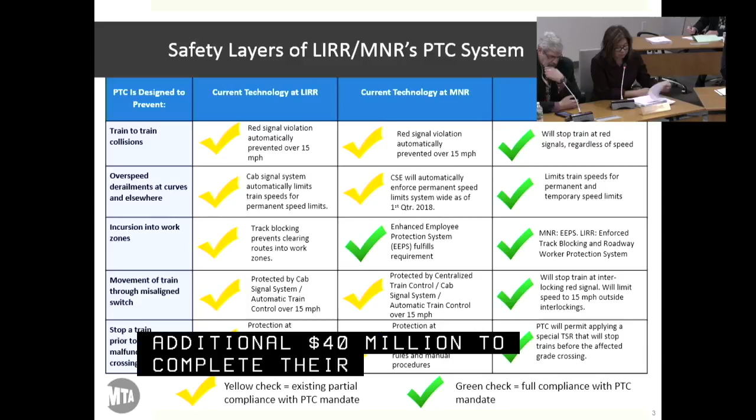This slide, the last time we met in October, it was apparent that we had not done a good job conveying the fact that we already have a PTC system in place that currently meets some of the FRA mandates for PTC implementation. The way Metro North and Long Island are deploying their PTC system, it's an overlay system. We're implementing the advanced civil speed enforcement system, which is found on other Northeast Corridor railroads, on top of our existing signaling system. This table conveys that information based on the yellow and green check marks.

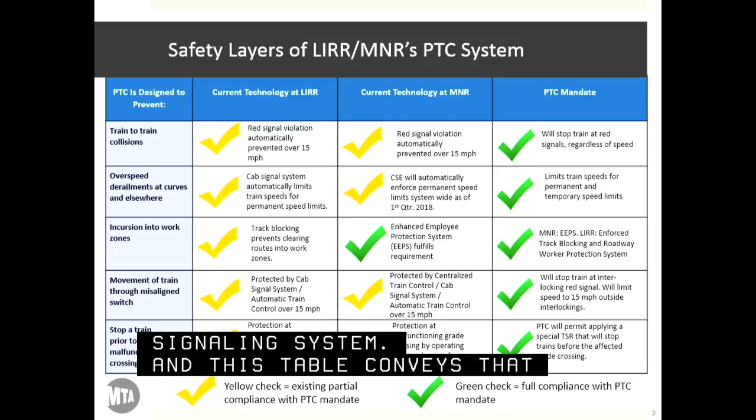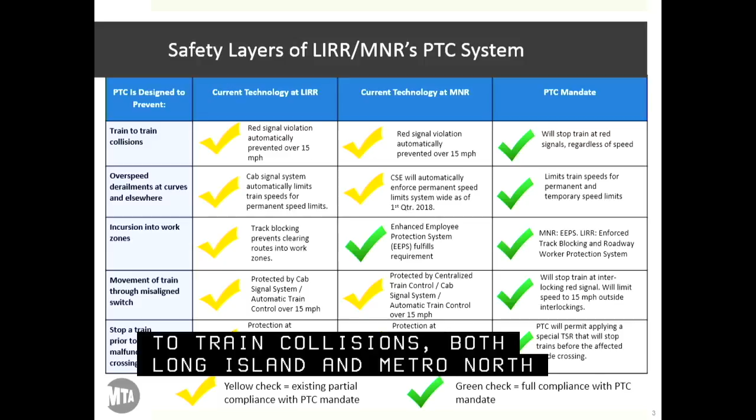The left-hand column shows the 5 PTC goals and identifies what PTC is designed to prevent. As far as preventing train-to-train collisions, both Long Island and Metro North have existing PTC systems that automatically prevent red signal violations for train speeds over 15 miles an hour. With full PTC, a train will have a positive stop at red signals regardless of speed. This will prevent all head-on and sideswipe collisions.

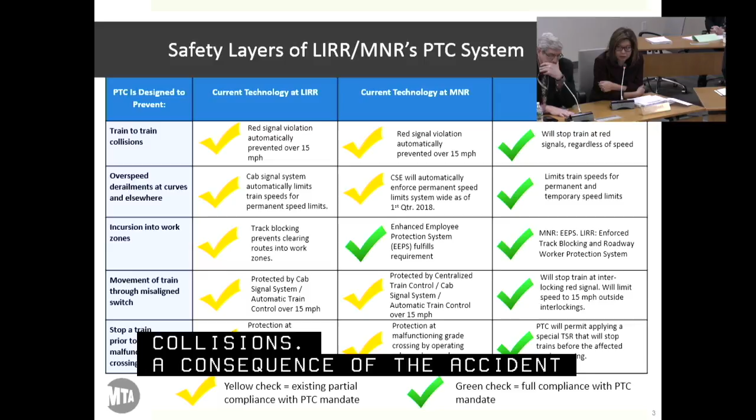As a consequence of the accident at Spuyten Duyvil, Metro North and Long Island went back and looked at their signaling system a couple of years ago. Currently, Metro North and Long Island both prevent overspeed derailment at permanent speed restrictions utilizing different methods. Long Island Railroad updated their cab signaling systems and implemented various modifications to prevent a train from reaching overturn speed on any curve under normal operating conditions.

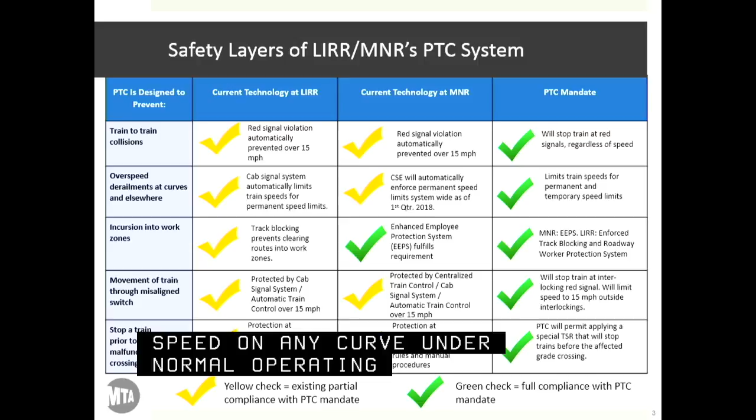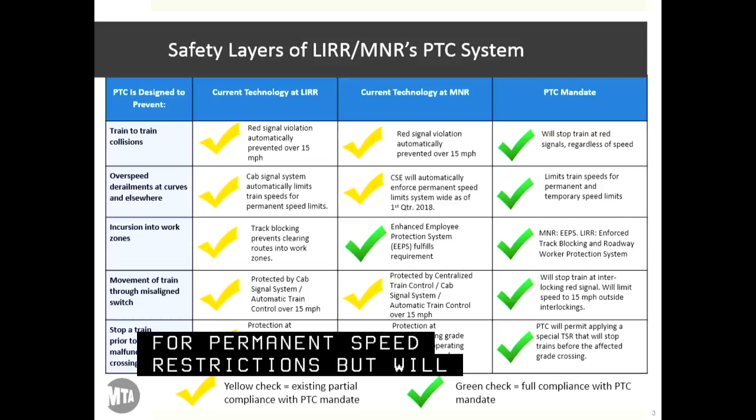Metro North has advanced the use of their PTC transponders to implement civil speed enforcement, and will have civil speed enforcement implemented system-wide as early as the first quarter of this year. With full PTC, both railroads will not only limit train speeds for permanent speed restrictions, but will also be able to do it for temporary speed restrictions when there is an anomaly on the railroad, such as a broken rail. They'll have to complete their office subsystem in order to have that capability.

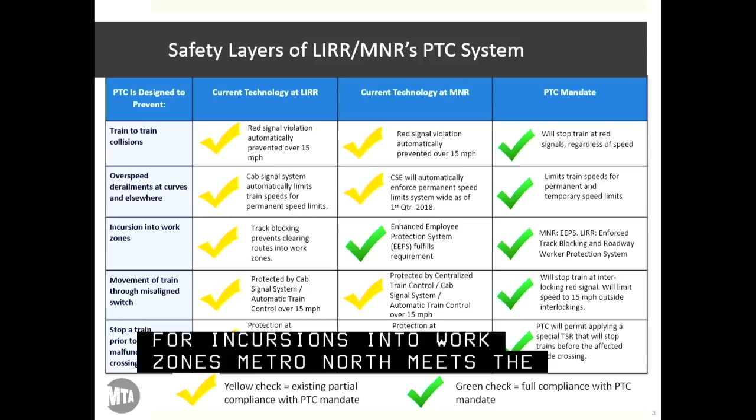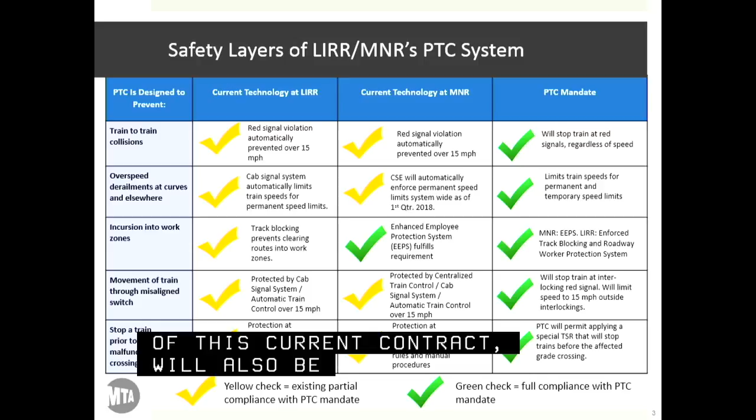For incursions into work zones, Metro North already meets the PTC mandate with their enhanced employee protection system, which has already been approved by the FRA. Long Island Railroad has track blocking, which allows a dispatcher to prevent routes into a work zone. Long Island Railroad, as part of this current contract, will also be implementing an ancillary roadway worker protection system. This new system will prevent anyone other than the roadway worker in charge from removing the work zone protection, which is a much safer system than we have today.

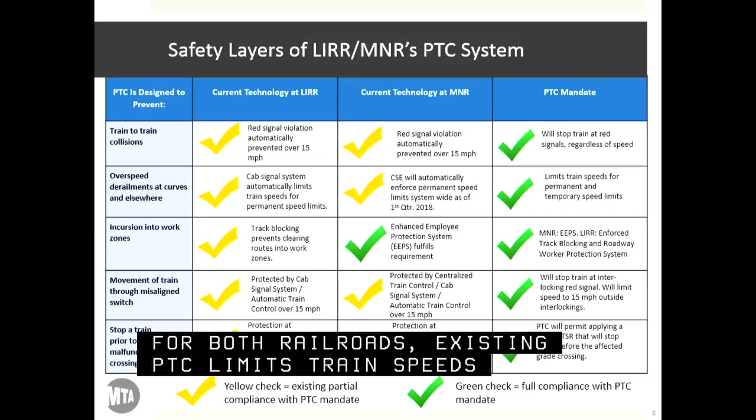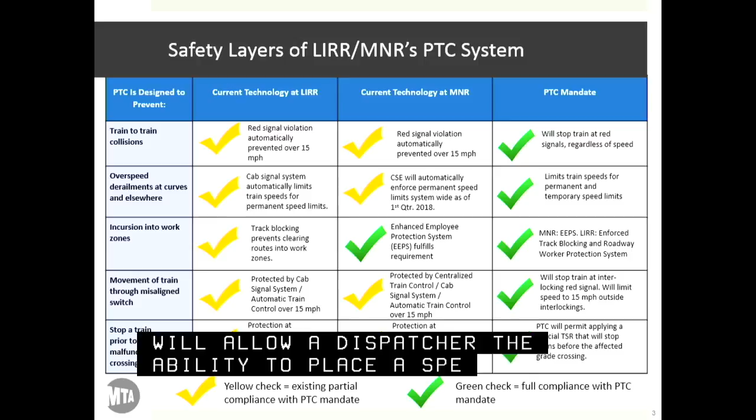For both railroads, existing PTC limits train speeds to 15 miles an hour if the switch is not properly aligned. Full PTC will prevent movement over misaligned switches. Protection at malfunctioning grade crossings is currently handled by operating rules and manual procedures. With full PTC deployment, PTC will allow a dispatcher the ability to place a special temporary speed restriction that will stop trains before the affected grade crossing.

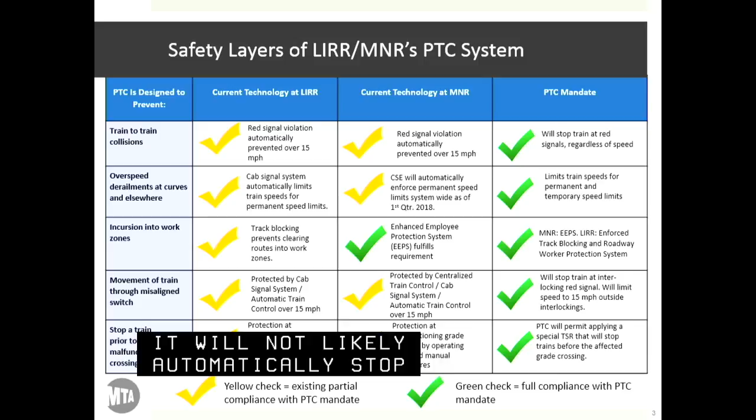However, the notification of the failure of a grade crossing is still a manual process, and someone will still have to report it, and it will not likely automatically stop a train knowing that there's a car on the tracks.

At the last board meeting, there was also a request to provide a simple dashboard to give everyone an idea of how the railroads are doing to meet compliance at the end of 2018 and also get the project completed. The four left-hand circles on the diagram identify the 4 criteria to be in compliance at the end of 2018.

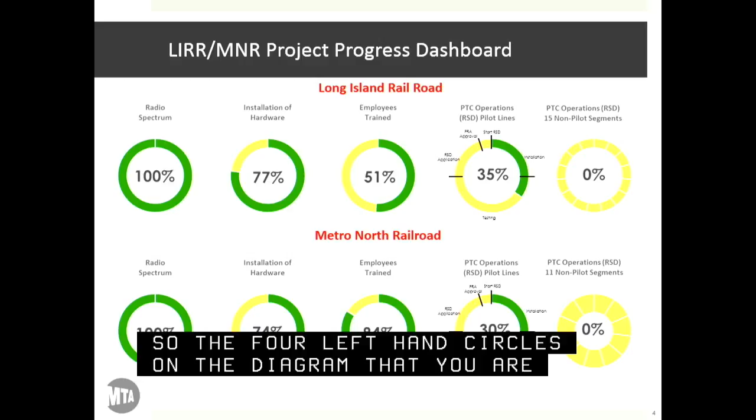The first is the acquisition of radio spectrum, which both railroads currently have. The second is the installation of hardware, and both railroads are roughly at the high 70% mark. The third is training, and we're clearly on our way to meeting our goal and completing that before the end of 2018. The fourth circle is probably the most challenging.

It's the criteria to have one of our subdivisions in revenue service demonstration. What this means for the railroads is we each have pilot lines approved as part of our implementation plan, and we need to show that our system has been fully tested and is safe enough for the FRA to approve and allow passengers to ride on those trains.

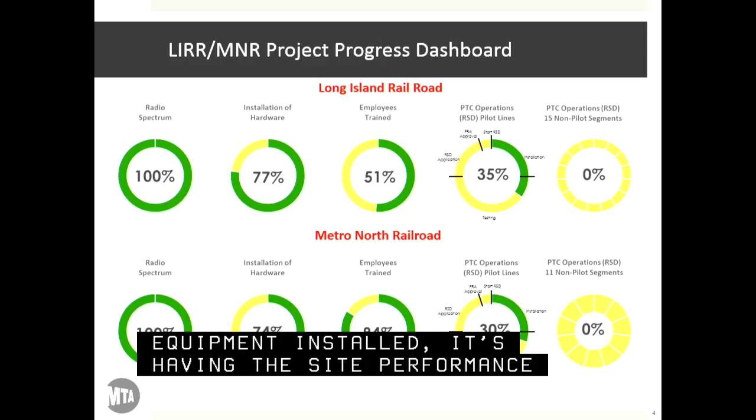The criteria to meet the RSD for the pilot lines is broken into having all our hardware installed, which both railroads have for their pilot equipment. It's having the site performance testing and data to support that completed, which we've started already. Part of it is the application to the FRA to get our revenue service demonstration approved, and then it's the actual approval. Both railroads have already started working on our application, so those four criteria is what we need to be in compliance.

Can I just ask, I assume when you say Metro North, you're referring to east of Hudson only? Yes, that's correct, and I'll get into a little more detail on that.

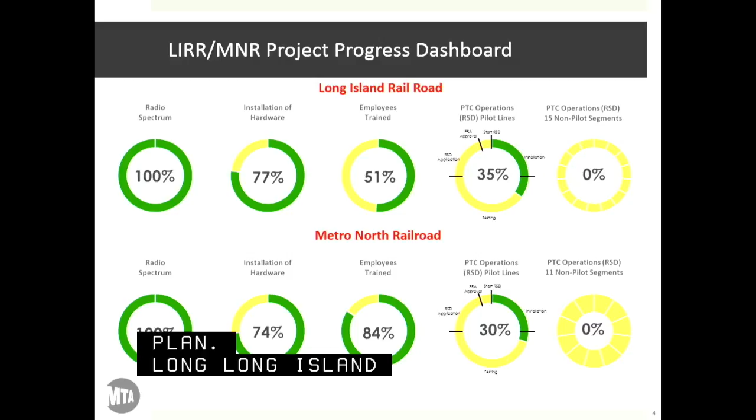Thank you. The fifth circle is what we need to complete the project, and each one of those tick marks indicates a non-pilot segment that's part of each railroad's implementation plan. Long Island Railroad has 15 additional line segments, and Metro North has 11. Each of those tick marks is equivalent to one of the circles on the left of the fifth circle.

The next three slides are our way of trying to convey the progress the railroads have made in hardware installations. Since we're all in the home stretch right now, we've tried to consolidate all the information on these few slides. The left-hand column shows the various elements of the PTC system. The system requirements are the installations required by the contract, not necessarily what's required for the FRA mandate, and that's shown in the column indicated in gold.

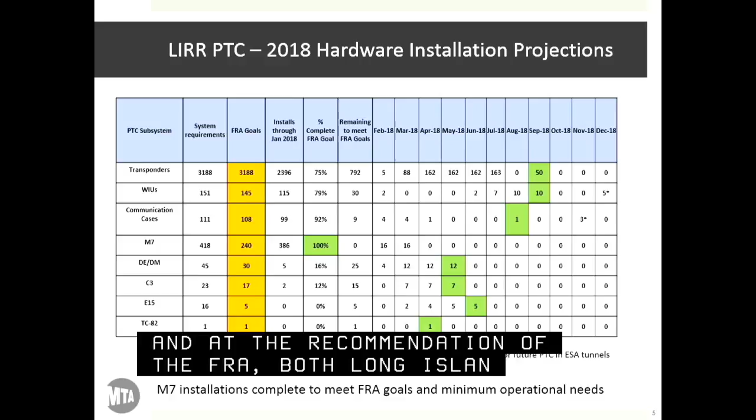These are the numbers to meet the PTC implementation plan, and at the recommendation of the FRA, both Long Island Railroad and Metro North have submitted revised goals for the hardware. As you can see, the numbers for the wayside elements are the same as what's required by contract. However, the numbers required for the trains are less, because in order to run operations you only need the front and back end of the trains equipped, so you don't have to equip all of them to meet the mandate.

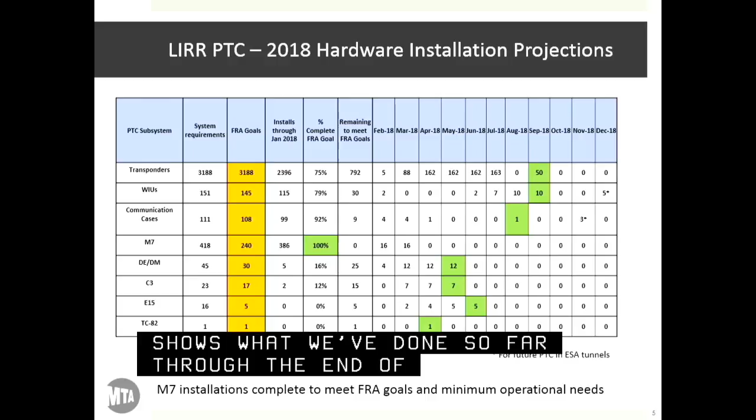The percent complete column shows what we've done so far through the end of January, and the remaining goals shown here is the projection to meet completion of the contract. The green highlighted boxes indicate the month in which we would meet the FRA goals, and the numbers shown on the projections are to meet the contract goals.

As you can see on Long Island, we have a couple of outliers until about November, December. Those are actually for work being done on the East Side Access tunnels, which is not required for compliance. But you can also see that Long Island Railroad has met their goals for the M7 installations.

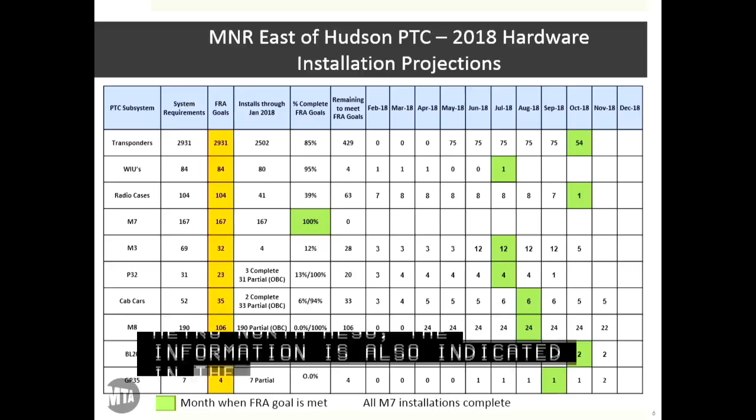On the next slide, similarly, Metro North's information is also indicated in the same way, and as you can see, they've already met their goals for the M7 installations as well.

They've shown their hardware projections in two slides. The first one is for east of Hudson, and slide seven is the installations for west of Hudson on the Port Jervis line. The important thing to note here is that the Metro North installation numbers are dependent on New Jersey Transit, which is responsible for the design and equipment provided to Metro North so that they can install it.

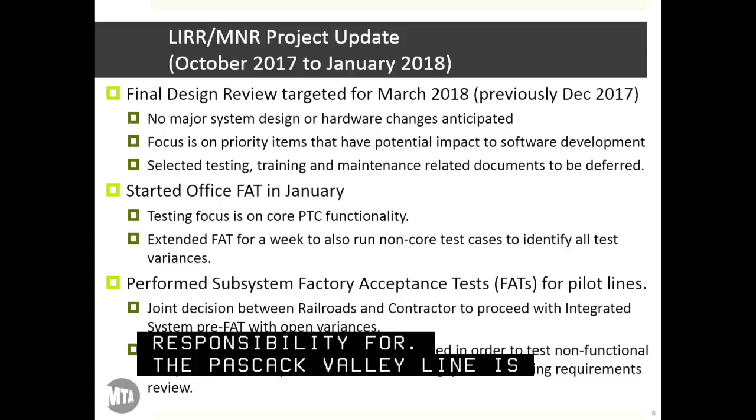I'd like to add that's the portion that Metro North has responsibility for. The Pascack Valley line is totally in the control of New Jersey Transit, so we're not neglecting a line — it's just not within our bailiwick at the moment. Thank you.

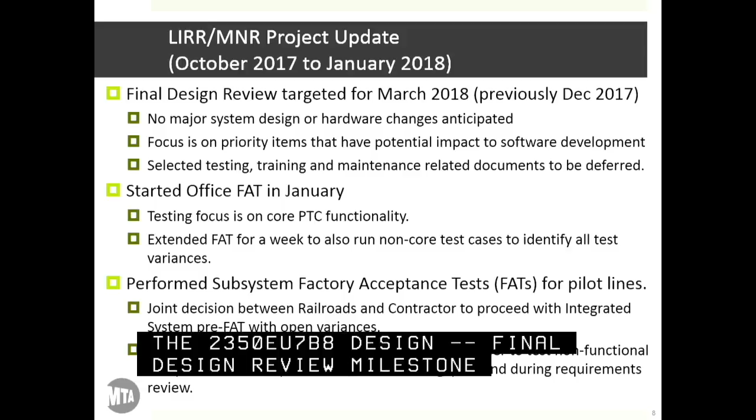Since we last reported in October, there were several project milestones that the project team was working hard to achieve. The final design review milestone should have been completed at the end of last year, but has been pushed into March. The delay in this milestone is somewhat less concerning than last year, as the team has done more testing and does not foresee any major system or hardware changes.

The team has also reviewed and approved most of the documents that have potential to impact software development and prioritized the necessary documents required for the FDR milestone. For instance, some of the documents related to training and maintenance have been deferred and are not directly tied to the design.

Both railroads started their office FAT and have subsequently also completed it in early February. To help mitigate some of the schedule delays, the focus initially was on testing the core PTC functionality. The testing teams also allotted an additional week to complete all of the testing for the non-core functions to identify all test variances before advancing to the next phase.

The success rate for the non-core functions did not meet the entrance criteria for the start of integrated system FAT. For Long Island, we had a success rate of roughly 82%, and Metro North had a success rate of roughly 68%. Based on that, the railroads and the contractor sat down, reevaluated the risk to move forward, and made a joint decision that we needed to move forward with open test variances.

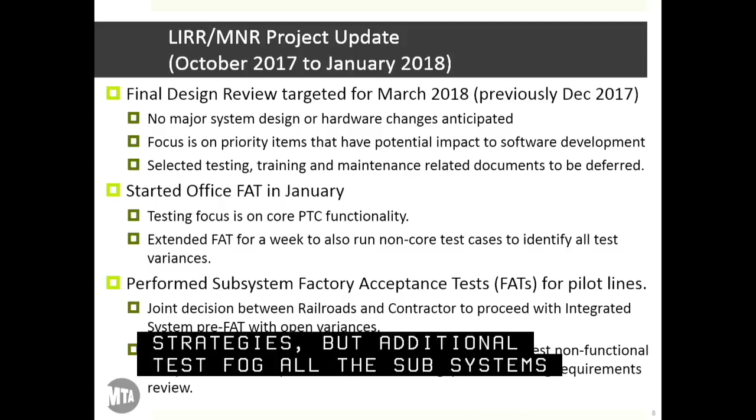I'll talk a little bit more about some of the mitigation strategies, but additional testing for all the subsystems remains to be scheduled, and the plan is to correct all of these test variances before we exit site performance testing on the pilot lines.

Another important activity that was raised by the IEC in their last report is the verification and validation of the PTC Vital database. Happy to report that this particular activity is moving forward. The contractor completed the work for the pilot lines in order for us to start our pilot testing in the field. They've added more resources to this activity, and have also been able to validate the process for the non-pilot lines. We don't anticipate any issues completing this task before May in advance of field testing.

Like we had reported, we continue with deliveries and installations. We're also continuing our efforts with training. No anticipated delays in completing that before the end of 2018.

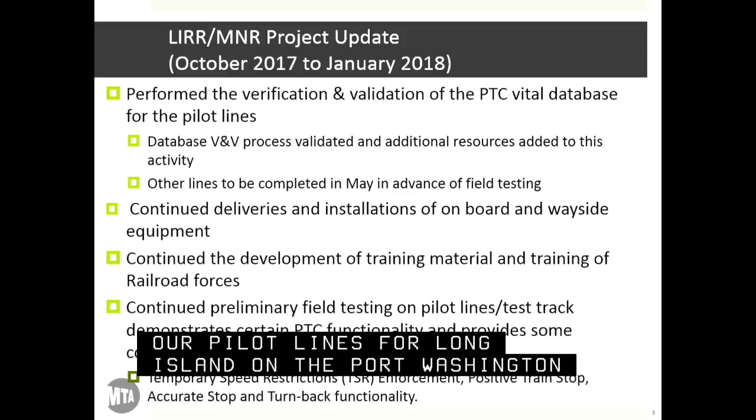The other good news is we have started field testing. Preliminary field testing on our pilot lines for Long Island on the Port Washington line, and Metro North on their test track, we've been able to demonstrate certain PTC functionality, giving us confidence in certain elements of the system design. We've been able to demonstrate the ability to send a temporary speed restriction list to the train and have that speed enforced. We've also been able to demonstrate positive train stop, accurate stop, and turn back functionality. So that's good news for us.

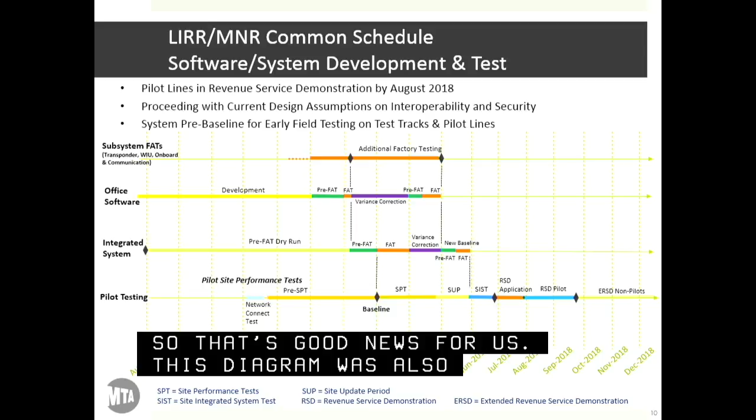This diagram was also a request by the board to provide more details about the software and system development. A little complicated, but what we try to do here is convey in a simple manner the complexity of the situation we're in regarding the development of the office software and subsystem FATs.

The top line shows the consolidated subsystem FATs for the elements of the wayside interface units, the transponders, the communications manager, and the onboard computer software. That effort, like I had reported earlier, is on its way. We've accomplished enough to proceed with pilot testing. We still have some work to do as far as closing out variances, so this is why you see two diamonds there. The first diamond, we've already passed. We're working on correcting those variances so that by the time May comes, we have those corrections incorporated.

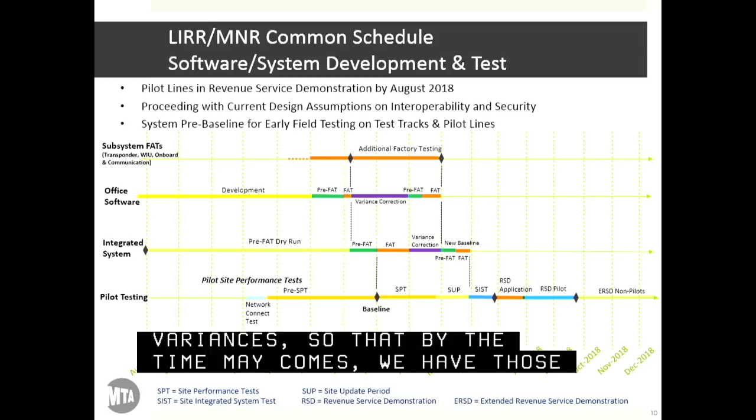The second line is the office software, which I reported we just completed the factory acceptance testing for. We'll continue to try to fix all of the variances that we've collected, and also give a little more time to the contractor to develop the functionality for some of the other functions such as interoperability and the roadway worker protection system for Long Island Railroad. The target is to have that also completed in the May timeframe.

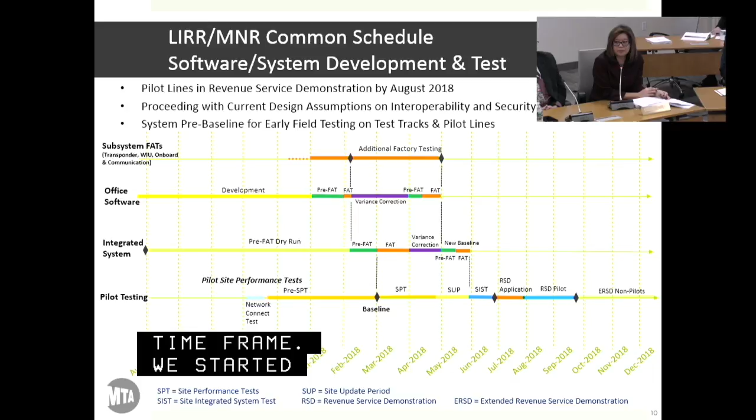We started the integrated system FAT, and we're slated to finish that sometime in the March-April time period. We will correct variances and try to get a new baseline software release sometime in the May-June time period.

As far as pilot testing, we're using a preliminary version of the software we already have to try to advance the identification of any test cases or variances that we may only see in the field. We will start site performance testing and go through what we call a site update period, when you monitor and verify the performance of the PTC system.

The plan is to fix all test variances uncovered during this period before we start the site integrated system test, the SIST period, when we would have the integrated software for all of the various elements. At the completion of SIST, we would have collected enough data to support our application to the FRA.

We have allotted a 2-month period for the FRA to review our application. Of course, there'll be a lot of other railroads submitting their RSD applications at the same time, so this is pretty aggressive, and this is an assumption on our part. In verbal conversations with the FRA, they've committed to try to meet this commitment and approve our application within 2 months.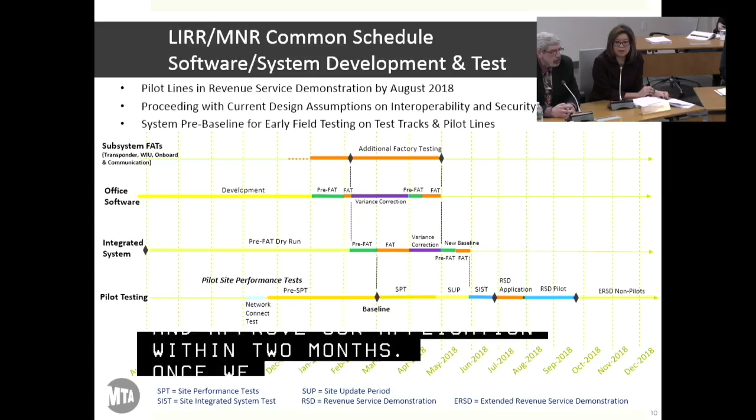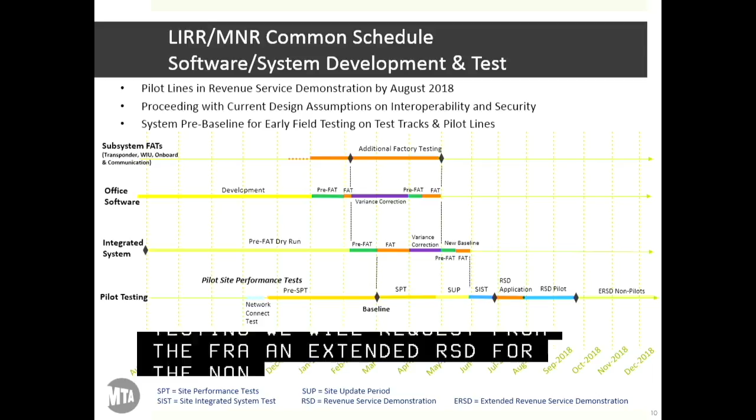Once we're in our RSD for the pilots, the concept is that most of the functionality issues uncovered during this period would account for all of the issues we'd find for the non-pilot. So when we get into non-pilot testing, we will request from the FRA an extended RSD for the non-pilot lines. During that particular period, we anticipate only uncovering issues that might be site-specific or unique to those actual lines.

The next slides provide a little more detail into the field testing, the approach the railroads are taking to place all the lines into PTC operations by the end of the year. While the railroads are waiting for the approval of their RSD application, shown in red, we'll start the site performance testing for some of the non-pilot lines.

In the case of Long Island Railroad, we plan to test 3 simultaneous lines and ramp up to as many as 6. This will take a lot of locomotive engineers and signal engineers to support that effort. The assumption is that most of the software bugs found during pilot testing would be corrected, and that only site-specific issues would be uncovered during this period.

Metro North has a similar plan. They have only 1 pilot line, and they were able to consolidate some of their line segments into one to make their testing more efficient. But the same premise goes for them as well, as far as vetting out most of their issues during pilot, which is why the time frame for the non-pilot lines is much more reduced than what was required for pilot.

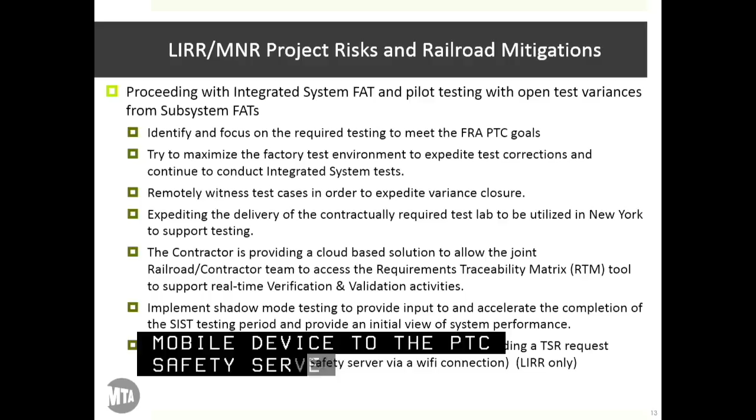So we're able to send a TSR request from a mobile device to the PTC safety server over a Wi-Fi connection in the lab, and we're able to prove that out. So in concept it works, but we just still need to complete the development of that function.

Another major risk is systems integration, and there are some issues that we can identify in the factory, and we've already found some and been able to rectify them, but many most likely will be revealed when we actually start field testing. So our biggest area of concern right now is the radio communications between the train and the wayside.

Another risk, and you've heard this before, and it's probably something pretty widespread across the industry, is the system integrator's ability to acquire and retain PTC knowledgeable resources to actually support the project to completion.

The railroads are still not satisfied with the level of staffing from the systems integrator, and although they've added staff in certain areas, they continue to lose staff in others.

So what they've done is they've acquired outside support for some of the key areas, such as design, testing, and requirements work. But of course, it takes time for these resources to gain the project experience, and in most cases, the SI continues to miss interim and major milestones on the project.

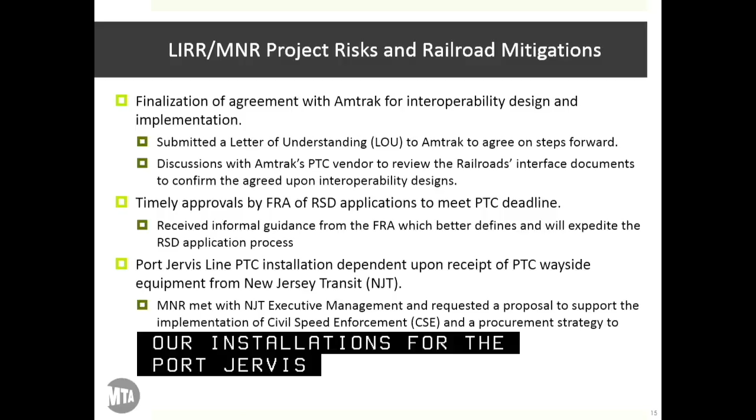The last risk is the dependence on New Jersey Transit to complete our installations for the Port Jervis line. Metro North has met with their executive management. They've requested a proposal to support the implementation of civil speed enforcement and a procurement strategy to expedite delivery of PTC equipment, so Metro North can get their installations done quicker.

The last two slides are a narrative on the project timeline and a look ahead. They provide, by month, project milestones through the end of the year. I won't go through the list, but feel free to ask questions. This list will be updated and should give you an indication every month whether we're on schedule.

Right now we've already completed our office FAT, and Metro North is on its way to completing civil speed enforcement on the east of Hudson. That concludes my report. Any questions?

Any questions? Yeah, just two questions. One, what happens if we don't comply by the end of the year?

There's two things. We are targeting completion at the end of 2018 to get all lines in PTC operations, but to not get fined by the FRA, you have to be in PTC compliance, which is the four circles I showed on the slide. We're pretty confident we're going to make that. We just have to get our pilot lines in revenue service demonstration, and based on the completion thus far, that should be no issue.

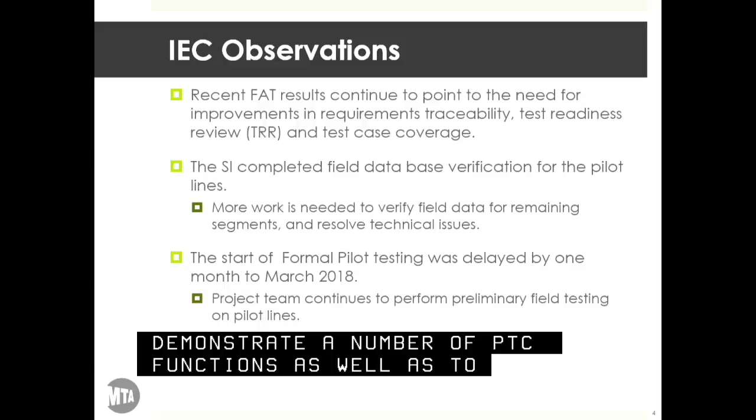To achieve completion by December 2018, multiple revenue service demonstrations are planned for non-pilot lines within a short period of time. The IEC is of the opinion that this would be challenging to achieve due to the magnitude of work to be done and potential constraints on resources and track access.

Based on our observation, we identified a number of project risks. For the most part, these risks are the same risks presented by Debbie and are being addressed by the project team.

First, with respect to schedule risks, the critical path leading to revenue service demonstrations is through system integration, pre-FAT and FAT activities, and site performance testing on the pilot lines. In the opinion of the IEC, there is limited time available in the schedule to finalize FAT activities for subsystems that have unresolved open items, as well as to address test variances associated with non-core requirements.

The IEC is of the opinion that resolving all functional test variances is necessary to ensure the integrity of the PTC system. The project team is addressing this risk and plans to mitigate or complete the variances concurrently with integrated system testing.

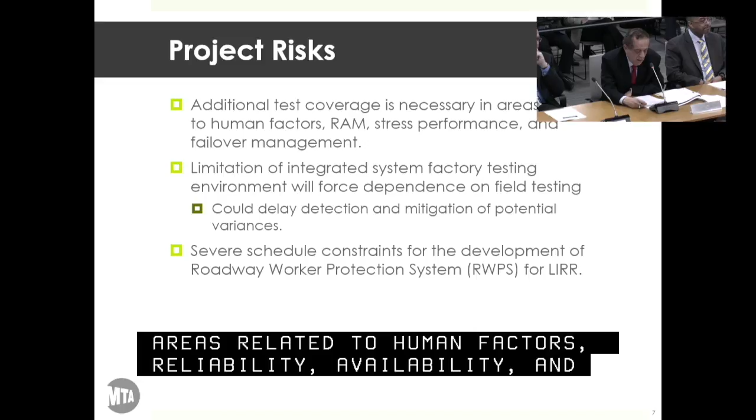Another risk is related to the limitations of the integrated system factory testing environment. As a result of these limitations, certain test cases need to be performed during field testing. This could delay the detection and mitigation of potential variances.

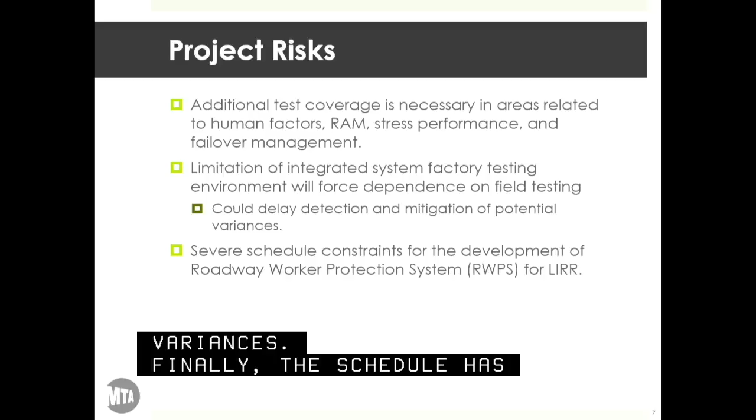Finally, the schedule has limited time available for the development of the roadway worker protection system, which is required for the Long Island Railroad. The Long Island Railroad made progress in demonstrating this function. However, a delay in completing the development of the RWPS could have an impact on the schedule for the pilot line.

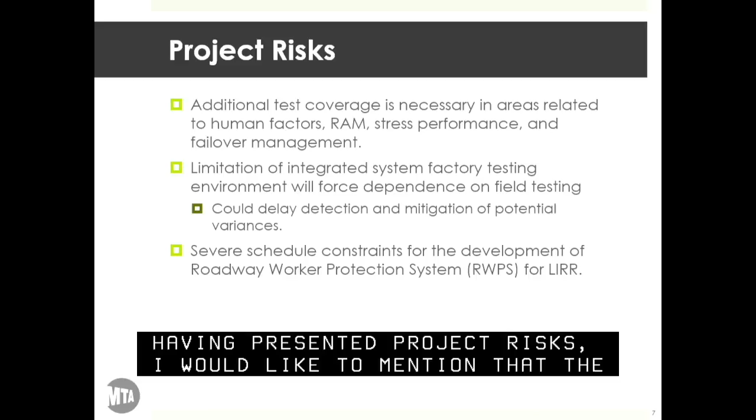Having presented project risks, I would like to mention that the IEC is encouraged that the project team is proactively addressing these risks and is making every effort to meet project challenges. This concludes the IEC presentation. I'll be happy to answer any questions.

Are there any questions? Thank you, Nabil. Now we're going to move forward to the Bridge and Tunnel Progress Report on its capital program. Joe Keane. Joe, if you could, it's all good news. If you can condense it, that would be great. And if anybody can find the HVAC guy, tell him to turn it up, down a little bit. Or provide oxygen into the room.

Welcome to Bridges and Tunnels Annual Capital Update. In today's presentation, I'll provide an update on our overall program status as well as facility-specific updates on our programs at the tunnels, the Verrazano, and the RFK bridges. I'll also introduce a program update at the Henry Hudson Bridge, where we're embarking on two transformative projects. And finally, I'll conclude with a review of our successful implementation of open road tolling.

First, an overview of our progress at a program level. We have committed 99% of planned Sandy and 2014 capital program projects, and we're approaching 40% with the commitments of the 2015 to 2019 capital commitments. Remaining commitments in that program are planned over the next 2 years.

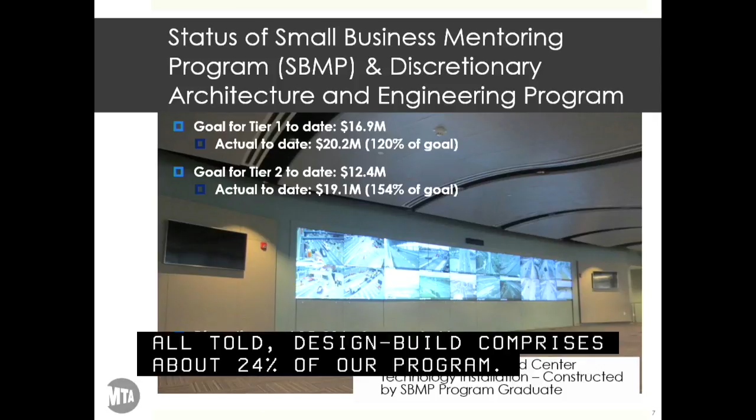This slide looks at how we're doing on small business mentoring programs, Tier 1 and 2, as well as the discretionary program for architect engineering firms. Overall, we're exceeding goals for the programs, and we've awarded 11 discretionary A&E tasks, most of which are related to SBMP projects. Next, I'll give an update on the Sandy restoration program at the tunnels.

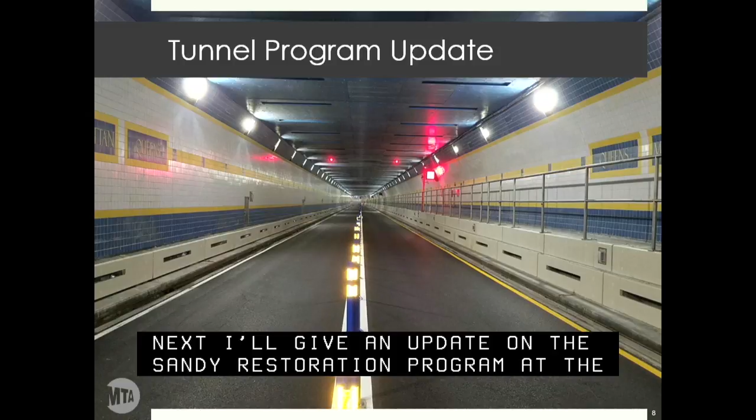Tunnel restoration projects integrate Sandy restoration work, capital improvements, and work on our plazas and consolidated projects in order to minimize impacts to our customers. In addition, flood mitigation measures are being installed and fully coordinated with these projects.

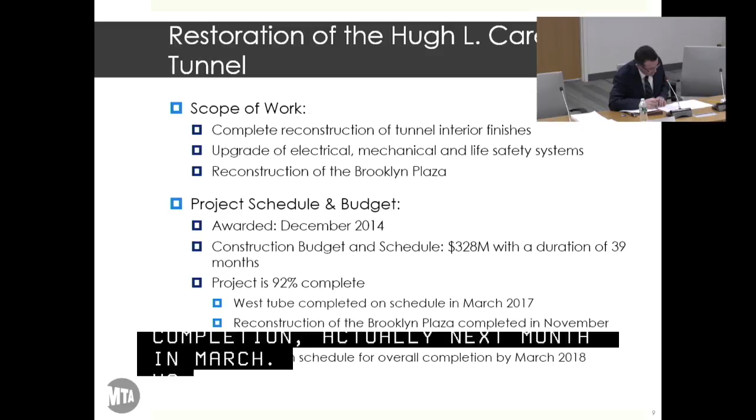The restoration of the Hugh Carey Tunnel was awarded in December of 2014, has a current budget of $328 million and an accelerated duration of 39 months. The project is on schedule for completion actually next month in March. Work on the tunnel includes complete reconstruction of interior, replacement of Sandy damaged systems and associated components, and reconstruction of the Brooklyn Plaza, all integrated to minimize impacts to the traveling public.

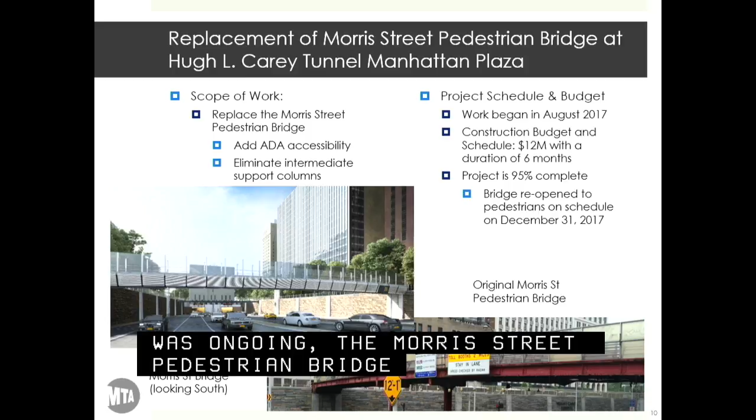While tunnel restoration work was ongoing, the Morris Street pedestrian bridge, which crosses the Hugh Carey Manhattan Plaza, was reconstructed. Construction began in August of 2017. The bridge was reopened to pedestrians in December. The new bridge adds ADA accessibility and has a free span over the plaza, eliminating intermediate columns that supported the old bridge, greatly improving operational flexibility.

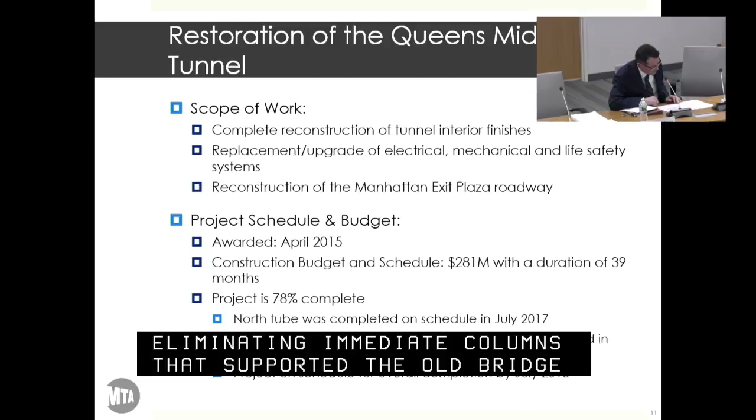Similar to the Hugh Carey Tunnel, restoration work is ongoing at the Queens Midtown Tunnel. The project was awarded in April of 2015, has a current budget of $281 million and an accelerated duration of 39 months. The North Tube and Plaza reconstruction were complete by July of 2017, and we're currently on schedule for overall completion in July of 2018.

Work on the tunnel includes complete reconstruction of tunnel interiors, replacement of Sandy damaged elements, and reconstruction of the Manhattan Plaza, all integrated to minimize impacts.

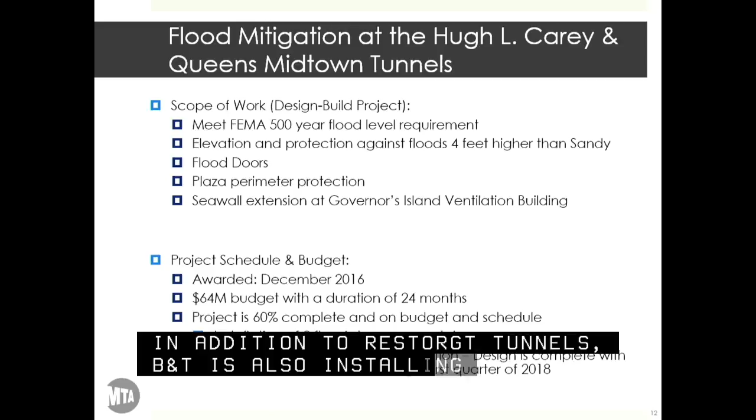In addition to restoring the tunnels, B&T is also installing flood mitigation measures at both tunnels and at the Governor's Island Ventilation Building to prevent damage from future storms. In 2016, a $64 million design-build project, largely funded by FEMA, was awarded for the installation of floodgates and perimeter protection at both tunnels and to raise the seawalls at the Governor's Island Vent Building. To date, all the flood doors are installed and the design is complete for remaining work. Overall, the project is 60% complete and on schedule for completion later this year.

We'll now show a short video of the project.

Roughly 125,000 vehicles per day use the Queens Midtown Tunnel and the Hugh L. Carey Tunnel to travel in and out of Manhattan. As such, they are critical links for the region's infrastructure. Up until 2012, these two tunnels never flooded. That all changed on Monday, October 29, 2012, when Superstorm Sandy hit New York. A record-setting storm surge of 9 feet caused floodwaters to inundate the Manhattan Plaza of the Hugh L. Carey Tunnel and the Queens Plaza of the Queens Midtown Tunnel. The HLCT was filled with about 60 million gallons of salt water, while the QMT was filled with about 12 million gallons. It took weeks of pumping to get all the water out. The damage from Sandy to the tunnels was significant, with critical tunnel components impacted.

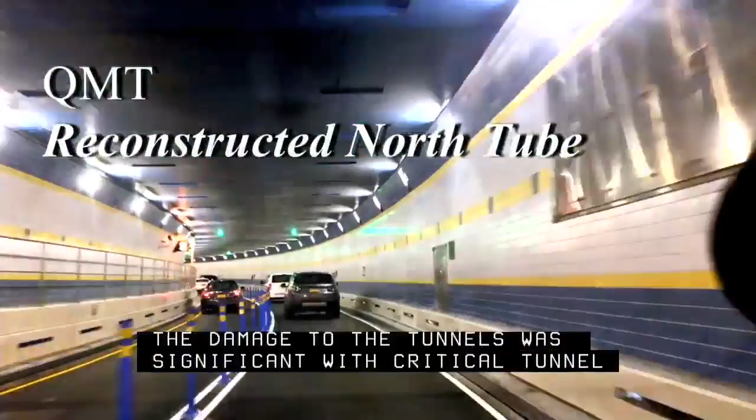TBTA awarded 2 contracts to repair the damage and restore the tunnels to a state of good repair. We are now approaching completion on these 2 contracts, with a combined value in excess of $500 million.

To protect from similar catastrophic flooding in the future, TBTA awarded a $64 million design-build contract called TUN Mid-01, largely funded by FEMA, to design and construct the flood protection scheme for the 2 tunnels and the Governor's Island Vent Building of the HLCT. All TUN Mid-01 work is designed to protect to the FEMA 500-year flood elevation, which is nearly 4 feet higher than Sandy's peak flood levels.

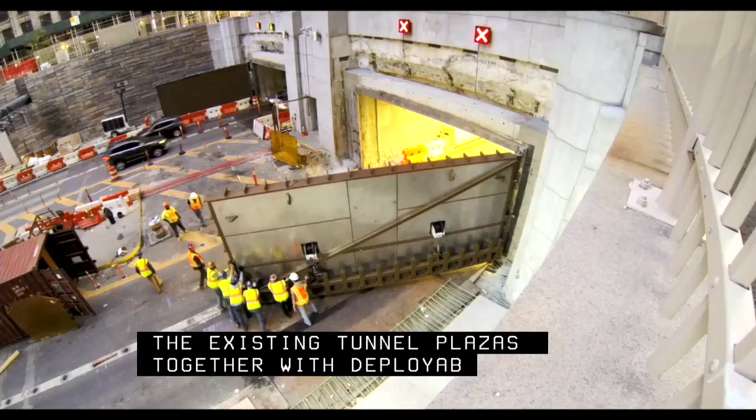To protect the tunnel plazas from flooding, the design provides 2 lines of defense using a belt and suspenders approach. The first line of defense will be a protected perimeter using the existing tunnel plazas together with deployable barriers to form a perimeter bathtub wall to hold back floodwaters. The second line of defense will be at the tunnel portals, where massive steel doors can be swung into position to totally seal off the tunnel and protect the interiors from floodwaters.

We will also raise the seawall at the Hugh L. Carey Tunnel's Governor's Island Ventilation Building, as that came close to flooding during Sandy and is an area of concern.

The design and installation of the new flood doors was a major undertaking, as they are unique, one-of-a-kind items which take into account several factors, including constructability, speed of deployment, and certainty of flood protection. The 8 flood doors, 4 each for the Hugh L. Carey Tunnel and 4 for the Queens Midtown Tunnel, were manufactured in Virginia by Wolfville Fabricators.

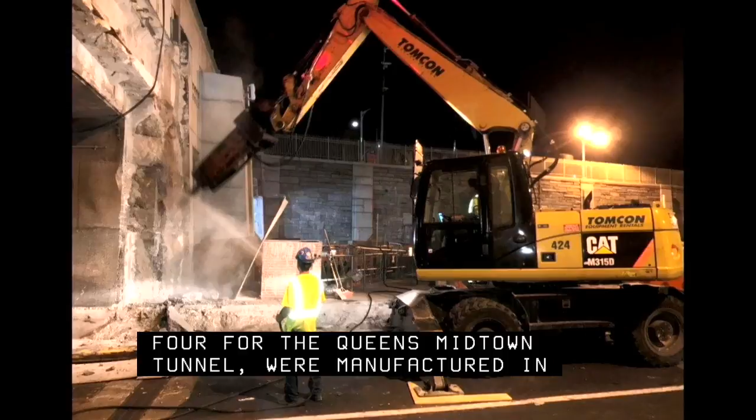While the doors were being fabricated, the contractor modified the tunnel portals by removing existing granite facing and installing the large concrete and steel frames that the doors will hang from. To minimize impact to the public, delivery and installation of each flood door was performed over a weekend concurrent with tunnel closures in place for tunnel reconstruction work.

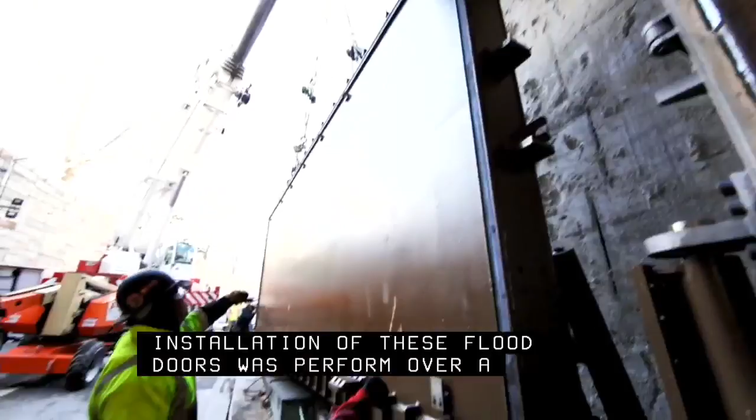Given that each flood door weighs approximately 50,000 pounds, trucking the doors to the work site and lifting it into position was a significant undertaking requiring the use of a 110-ton crane.

Contract Tunmit 01 required all 8 portal floodgates to be installed within 12 months of the notice to proceed. With the 8 portal floodgates installed on December 9, 2017, this requirement was met.

There's still plenty to do on the project, including raising the seawall at the Governor's Island Ventilation Building, but already we're in much better shape with regard to protection from flooding from hurricanes and other storms. Currently, Tunmit 01 is on schedule for substantial completion by December 31st, 2018, and is proceeding within budget.

Next, I'd like to give an update on the program at the Verrazano-Narrows Bridge. Shown in blue on the slide are 2 significant projects which are now complete.

The $248 million replacement of the upper-level suspended span deck and its reconfiguration to provide a 7th lane reversible bus HOV lane on the upper level, and a $91 million construction of a new bus HOV ramp on the Brooklyn side of the bridge, providing direct access to the new upper-level HOV lane.

These 2 projects were the final part of a coordinated series of initiatives between MTA B&T and New York State DOT to create a continuous bus HOV lane from Staten Island to Manhattan. With the use of incentives, both projects were completed ahead of schedule, allowing the bus HOV lane on the Verrazano to open almost a year ahead of plan, in coordination with implementation of open road tolling.

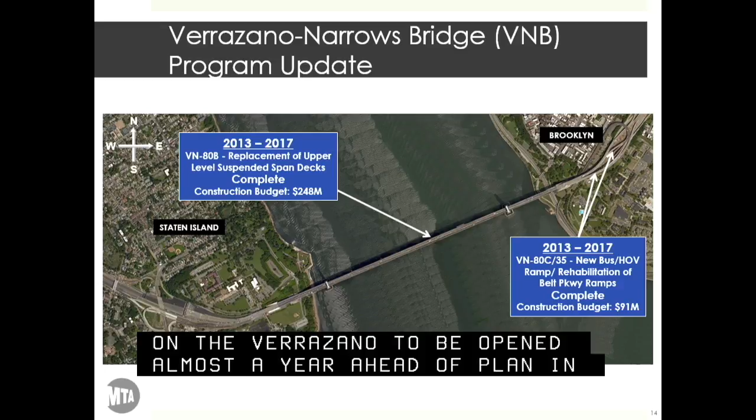This continuous bus HOV lane from Staten Island to Manhattan has enhanced regional mobility, improved access for express buses and HOV3 vehicles, and reduced travel time, significantly benefiting mass transit and thousands of daily express bus passengers. We'll now show a short video of the bus HOV lane from a customer perspective.

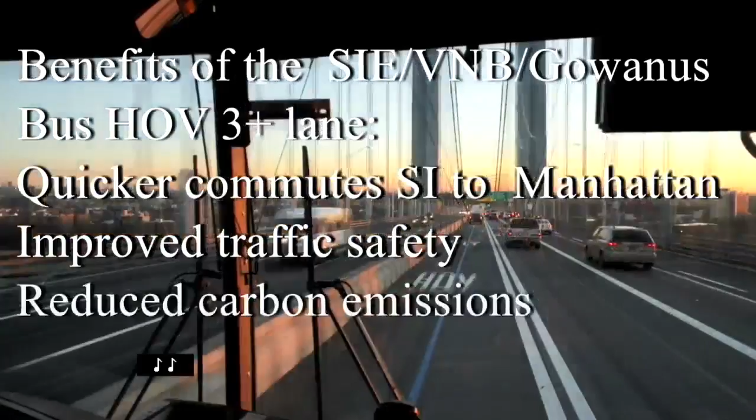Next, I would like to discuss the RFK program.

Nothing makes me happier than seeing buses given priority, well, lots of things make me happy, but I'm really happy when buses are given priority on our roadways, on our bridges, and our tunnels. Do you have a sense of how many buses, I don't know if I missed that number in the presentation, but how many buses are using that lane? One of my favorite stats, Ronnie, you can appreciate this, is the exclusive bus lane transports like 1,800 buses every hour, I think, or during that 3 hour peak? Do we have a sense of how many buses are actually utilizing that HOV lane? Yes, altogether. There was a number of... Yeah, I have them.

There's about 1,500 a day in the peak period, yeah.

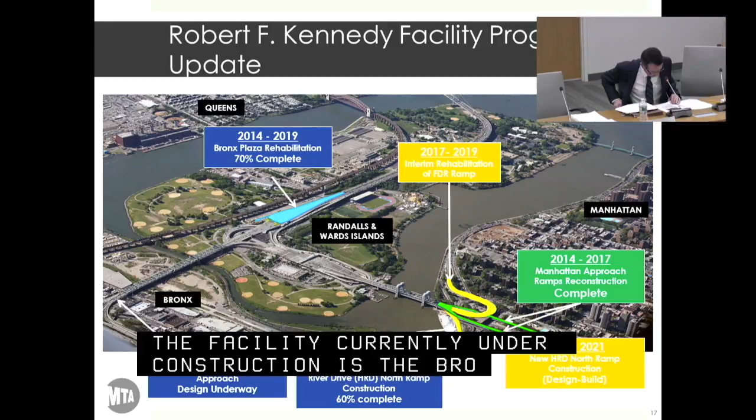Highlighted in bright green are the on and off ramps from RFK to Manhattan, which were completed in October 2017. Highlighted in blue is one of the remaining 1930s era portions of the facility currently under construction—the Bronx elevated structure. Construction on the Bruckner approach ramps and footings for a future direct connector ramp to the Harlem River Drive are being implemented via interagency agreements with both New York State and New York City DOT.

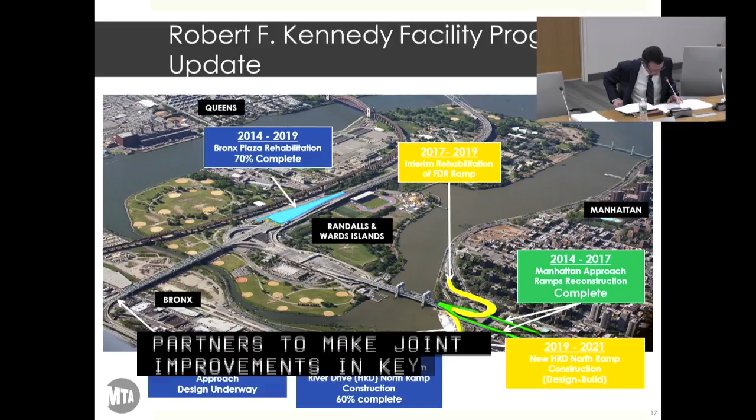These are examples of our strategy of working with transportation partners to make joint improvements in key corridors, to the benefit of the entire region while minimizing impacts to customers. Highlighted in yellow is a new Harlem River Drive direct connector ramp that will be constructed later in this program, as well as the FDR ramps, where we are currently undergoing interim repairs to extend the service life. First, I'd like to discuss a major completion: the reconstruction of the on and off-bound ramps from RFK to Manhattan.

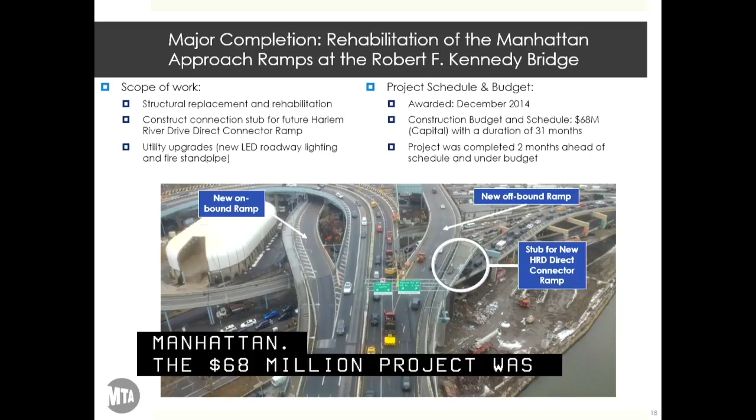This $68 million project was completed two months ahead of schedule and within budget. Customer impacts were minimized by the use of a temporary bridge for off-bound ramp traffic. One key feature of the project is the construction of a tie-in stub for the future Harlem River Drive connector ramp, which I'll discuss in the next slide.

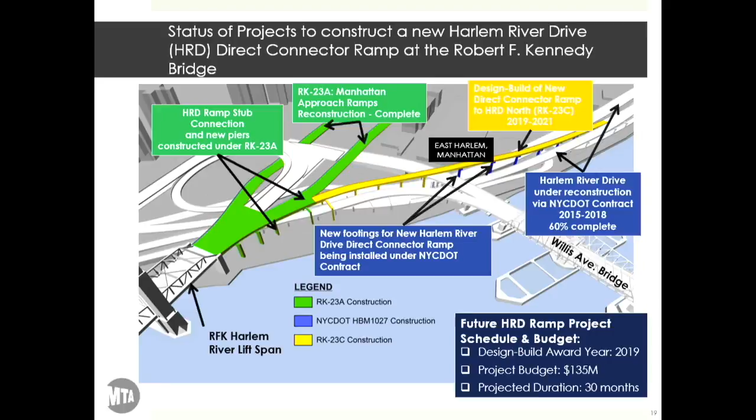Phase 3, shown in yellow, is the future design-build project to construct a connector ramp from the RFK to the Harlem River Drive. This project is planned for award in 2019. Once complete, it will allow traffic to directly access the Harlem River Drive from the RFK, avoiding local city streets, which will benefit our customers and the local community in East Harlem.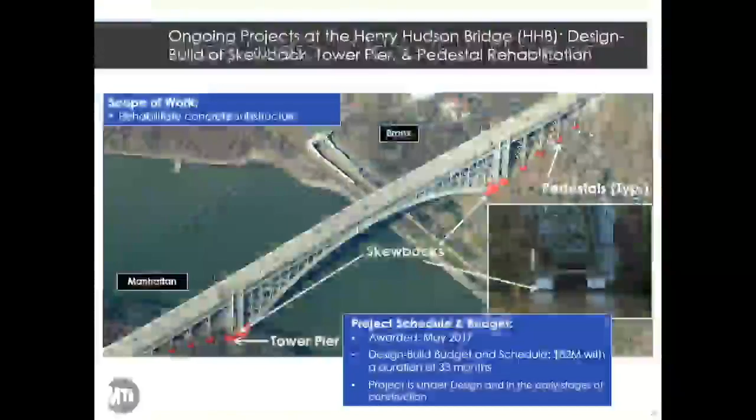Next, I'd like to introduce the Henry Hudson facility, where we've begun construction on two transformative projects. Shown here is an ongoing project to reconstruct the concrete substructures of the bridge, including the skewbacks and pedestals, shown in red. The project is a prime example of successful implementation of design-build.

The concrete skewbacks, which are large blocks of concrete that support the steel arch, and the concrete pedestals shown in red, need to be reconstructed to maintain the facility in a state of good repair. While the pedestals can be replaced, the skewbacks cannot, and therefore innovation was necessary to determine an optimal rehabilitation scheme. To take advantage of contractor innovation, the authority issued a design-build RFP to address rehab of the skewbacks and pedestals and extend the life of the bridge.

The design-build project was awarded in May for $82 million, with a duration of 33 months, and is in the early stages of construction. Construction is below the roadway and traffic impacts are expected to be minimal.

The next slide shows the staged reconstruction of the upper and lower plaza decks and the southbound approach of the Henry Hudson Bridge. This will replace one of the last pieces of the 1930s era Henry Hudson Bridge construction and eliminate the support columns that currently reduce sight lines for traffic traveling on the lower level.

The reconstruction of the plaza decks is facilitated by the successful implementation of open road tolling and the relocation of utilities done in prior phases of the project. The project was awarded in April 2017 for $86 million, with a 19-month period of lane closure impacts, and is currently in the early stage of construction. Two lanes of traffic, matching the two lanes on the Henry Hudson Parkway north of the bridge, will be maintained in each direction to minimize impacts to the public.

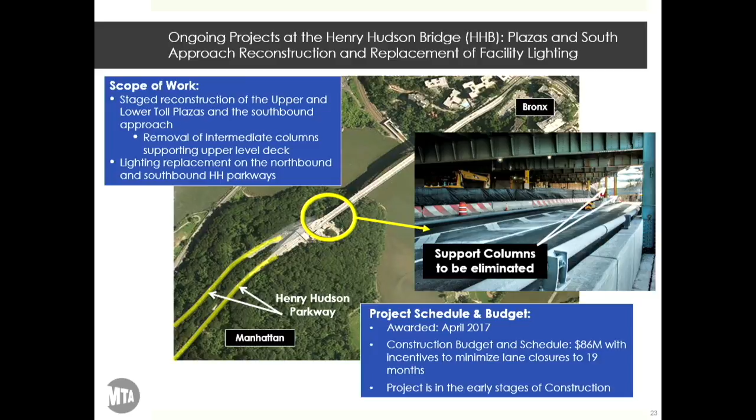The contract also includes significant incentives to minimize the period of construction impacts.

Now I'd like to conclude with a brief review of the update of the open road tolling implementation that was done facility-wide in 2017. Implementation of open road tolling at our 7 bridges and 2 tunnels completely transformed the existing plazas, as you can see from the before and after pictures of the RFK Manhattan Plaza.

Work entailed removal of old toll plaza infrastructure, including toll booths, canopies, islands, related HVAC electrical systems, and gated tolling equipment, and the construction of monotube gantries to support new open road tolling equipment. We also installed new concrete pavements within the tolling zone, modified vertical and horizontal alignments for higher speed, and channelized traffic for the open road tolling environment.

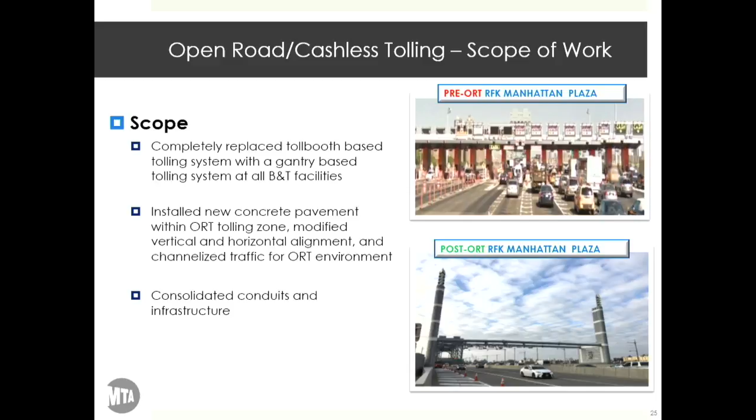All of this work was seamlessly integrated with our ongoing largest ever capital program. For efficiency and speed, we used an integrated program delivery method, allowing us to leverage existing competitively procured contracts at each facility using contractors that were already mobilized at these sites. This maximized coordination with ongoing reconstruction work and helped minimize customer impacts. We employed aspects of design build to ensure full engagement of all the stakeholders and to ensure project success.

The last 2 facilities, which were the Bronx Whitestone and Throgs Neck Bridge, were brought online in September of 2017, 3 months ahead of the planned overall completion date of December 2017. Remaining work focuses on completing plaza modernization and site improvements.

B&T budgeted $501 million in the current program. For ORT, to date, we've obligated $343 million, and we expect to complete the program within budget. As you can see, there are multiple benefits from the ORT program, not least of which is a $650 million capital cost avoidance over the next 20 years by not having to rebuild traditional toll plazas.

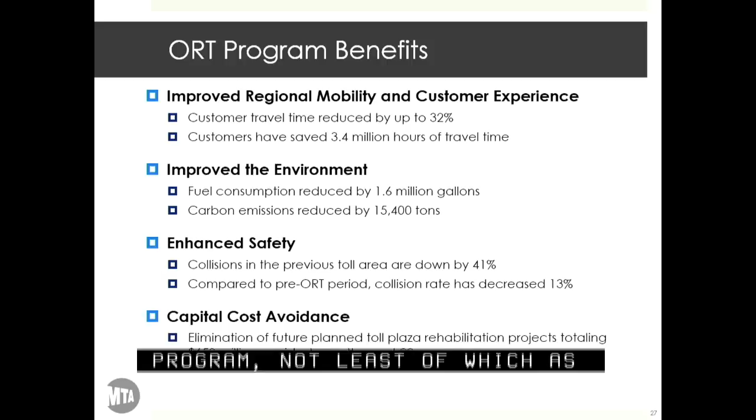We'll wrap up the presentation with a short time-lapse video of the RFK Plaza transformation under open road tolling.

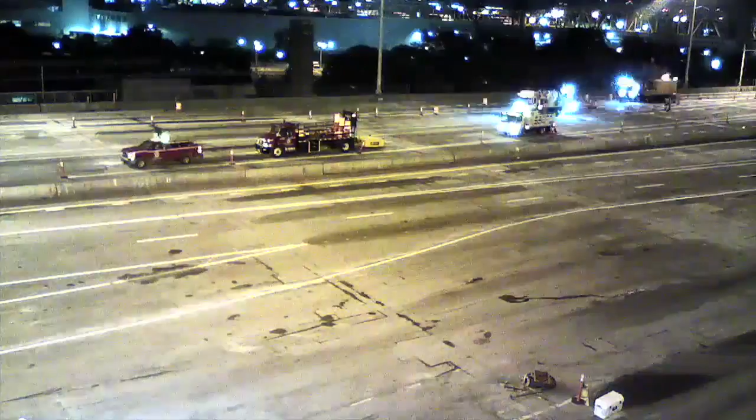Thank you very much. The independent engineers. Good afternoon, Mr. Chairman and board members. My name is Calvin Gordon. I'm presenting the IEC's project review for both the Hugh Carey Tunnel and the Queens Midtown Tunnel restoration projects.

Looking at the schedule and budget review for Hugh Carey Tunnel, as the agency stated, the project is projected on schedule for March 2018 substantial completion. With approximately a month left, IEC is of the opinion that while this is aggressive, it is achievable with the contractor sustaining a high level of effort. With regards to the budget, IEC concurs that the project remains on budget.

Looking at the observations with regard to commissioning activities, there was a longer learning curve than originally anticipated for site acceptance activities. This was partially due to performing some commissioning activities in both tubes as opposed to completing all testing in one tube, thereby not taking advantage of lessons learned.

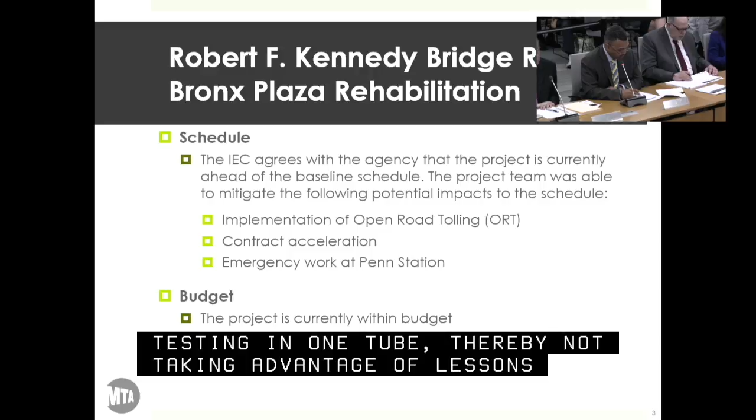The IEC's system integration testing is a key topic, and as the schedule is compressed, we are anticipating a review of the integration plan activities for future comments. Another observation is that the substantial completion date is in the freeze-thaw cycle, and with the current extreme weather conditions experienced, it may present a challenge for all weather-sensitive work such as grouting, paving, etc.

Additionally, the delivery and training of O&M materials appear to be lagging by the contractor. While this will not hold up substantial completion, it needs to be addressed well in advance of the project closeout. Finally, the IEC recognizes the importance that senior level management involvement has had in positively impacting the achievement of milestones and goals in this project. Meeting with contractor senior management periodically and keeping track of accountability for the project's success is evident and has demonstrated success. Moving to the Queens Midtown Tunnel Review, as far as the schedule, the contractor is forecasting to meet the planned substantial completion date.

The IEC concurs that this is achievable with current levels of effort maintained. With regards to the budget, the IEC concurs that the project is within budget as indicated by the project team. Finally, our observations. The IEC has the following observations.

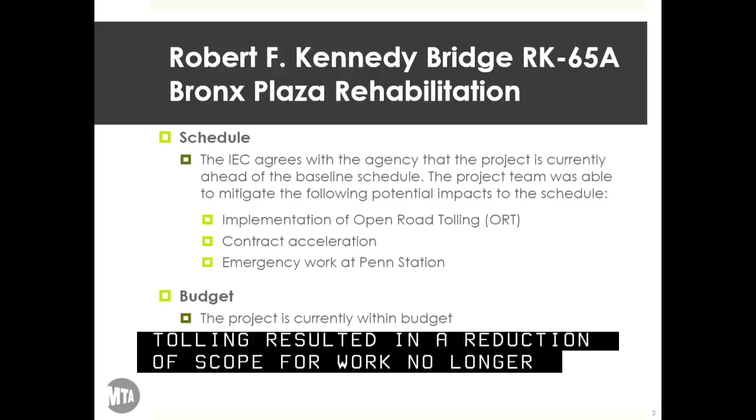On the RFK RK65A project, the IEC agrees with the agency's assessment that the project is currently ahead of the original baseline schedule. The following potential schedule impacts were mitigated: the implementation of open road tolling resulted in a reduction of scope for work no longer needed, and the number of work stages was reduced, saving time and money. The contractor was given a contract modification to accelerate the project to complete all permanent lane closure work by the end of this summer, which is several months earlier than the baseline schedule.

Work on the mainline bridge was halted for two months during the emergency work at Penn Station. The project team was able to mitigate the two months. Permanent lane closure work is still scheduled to be completed within the accelerated schedule. Project is currently within budget. As mentioned, open road tolling resulted in savings for work no longer required.